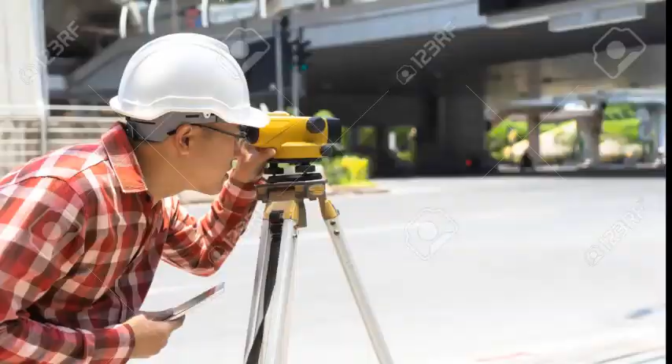In the previous class, we discussed temporary adjustments involved in the instrument. Temporary adjustments are the adjustments done to the instrument before taking readings. We discussed that there are 7 steps involved in temporary adjustments.

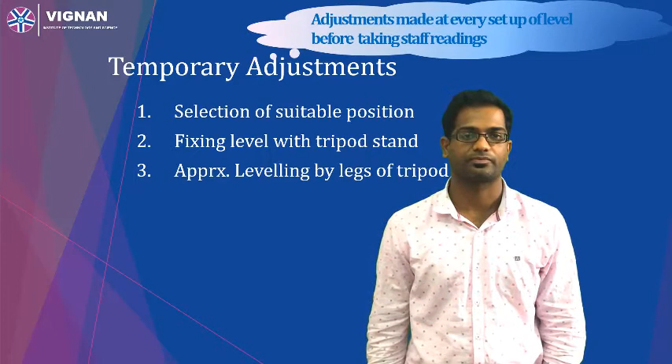Selection of suitable position, fixing level with the tripod stand, approximate leveling by legs of tripod stand, perfect leveling by foot screws, focusing the eyepiece, focusing the object glass, and taking staff readings.

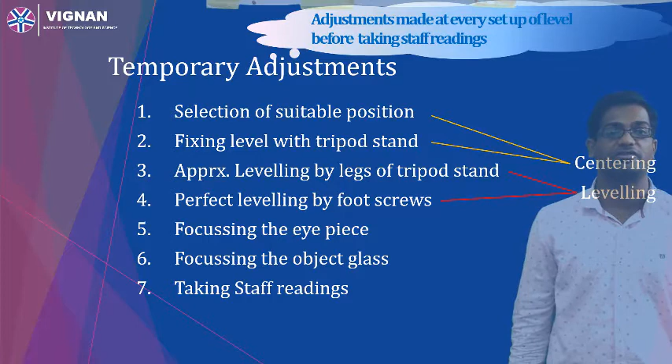These can be categorized into 3. Selection of suitable position and fixing level with the tripod stand can be categorized into centering, which involves centering of your instrument station onto the ground. Whereas third and fourth, which involve approximate leveling of tripod legs and leveling using foot screws, come under the leveling category.

5, 6, 7 temporary adjustments mainly involve focusing. So the entire 7 adjustments can be categorized into 3: one is centering, second is leveling, third is focusing.

In centering, we ensure that our tripod and instrument is exactly over the ground station point where the surveyor wants it to be. In leveling, the surveyor ensures the tripod and the mounted instrument are exactly leveled. In focusing, the surveyor ensures that the objective glass, focusing glass and the eyepiece are clear and the object can be visible.

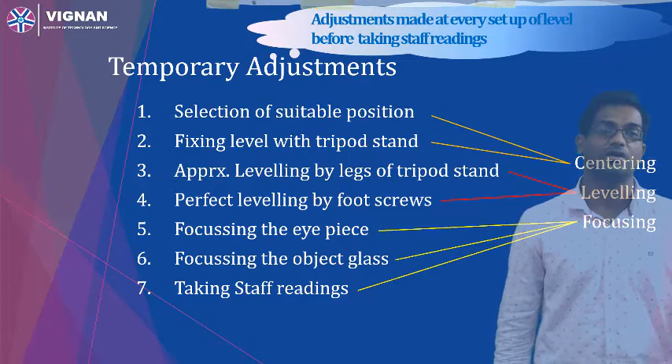We have discussed how foot screws are used in order to make the instrument level. Today we will discuss methods of leveling.

We have learned that we need a line of collimation or a reference line which is used to calculate the levels of ground. In order to calculate the levels of ground, or here onwards I will call reducing levels of ground, you need to have a systematic approach to write down those levels.

In compass surveying, we have 2 systems where we note down the values: one is whole circle bearing system, second is quadrantal bearing system. These 2 systems represent the magnetic bearings using compass. The meaning is same, but the notation is different.

In the same manner, in methods of leveling, we also have 2 methods. The meaning is we need to find out the reduced levels of different ground positions on earth, but there are 2 different systems. One is the line of collimation system or height of instrument.

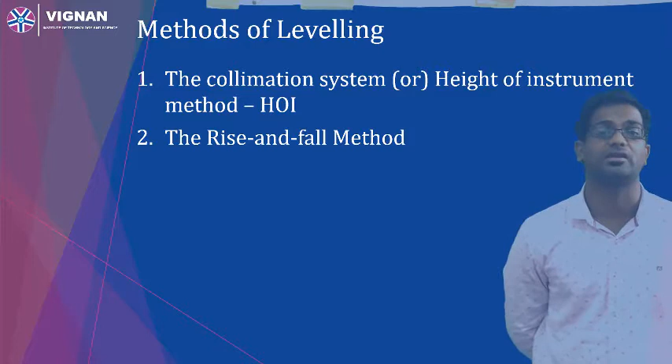The collimation system, or height of instrument method. The second is the rise and fall method. These 2 systems are used in order to calculate the reduced levels of ground points.

Let us discuss the height of instrument method. Observe the diagram very carefully. Let us consider the ground level is in the pattern of something like this. Let us assume that the ground pattern is something like this.

We have discussed that the ground is never leveled properly. In order to calculate the ground levels of these points, we will set up an instrument preferably where we have visibility on all sides wherever the surveyor wants to calculate the reduced levels.

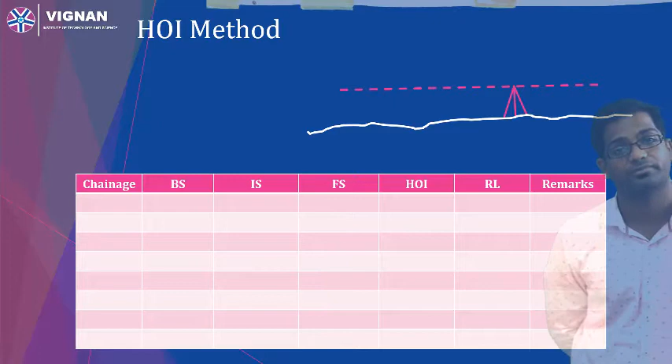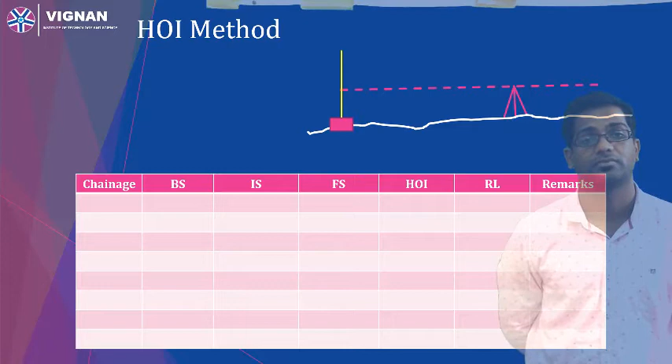When the instrument is complete with temporary adjustments, that is centering, leveling and focusing, you will get a reference line which we call the line of collimation, as shown in the dotted line. Now the surveyor takes the first reading at a known elevation.

This level is called a benchmark. If the benchmark is known to him, he will take that value for his considerations, or otherwise an arbitrary benchmark of 100 meters is taken. Because this is the first reading, this reading is called a backsight.

And let us take one intermediate sight which is taken at A, and let us take B, which is the last instrument staff reading, which we note as a foresight.

Let us do a small problem in calculating the reduced levels of A and B with reference to a benchmark of 100. Now what does this mean to you? You need to calculate the reduced level of A, reduced level of B with reference to the benchmark.

If the benchmark is 100, what about A? Was it 101 or 102 or 98 or 99? How much is it? In the same way, point B also needs to be calculated.

Because staff readings are known to you, at backsight as 1.255, at A intermediate sight as 1.750, and at B foresight as 2.750, by using the height of instrument method, you can easily calculate the reduced level of ground points A and B.

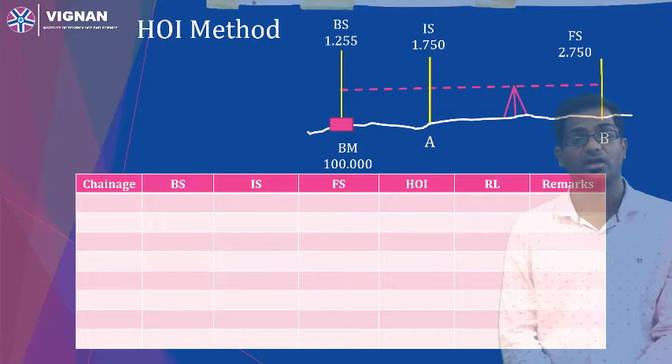First, we need to note down the tabular form given below. The tabular form for height of instrument consists of backsight, intermediate sight, foresight, height of instrument, reduced level, and remarks.

First, we write down the chainage in the column. Let us take chainage at benchmark as 0, and write down that value in the chainage column. At 0 chainage, the backsight reading is 1.255. Against that row, we write in the remarks column 'benchmark', and at benchmark the reduced level is 100.

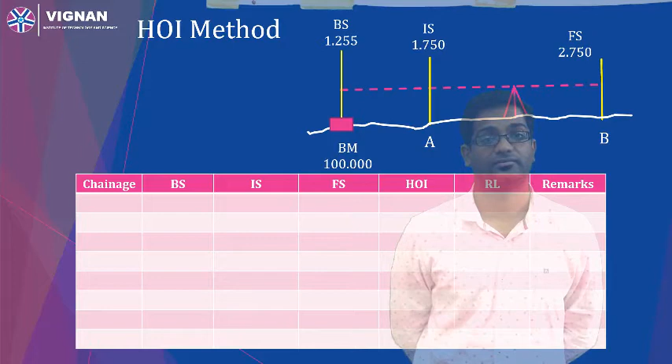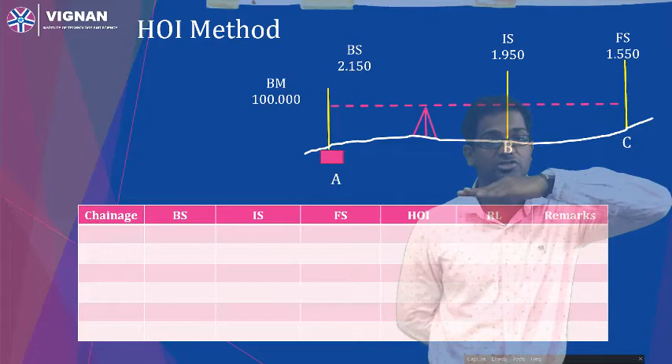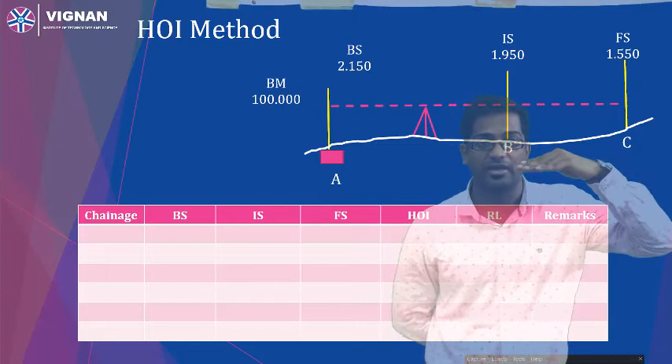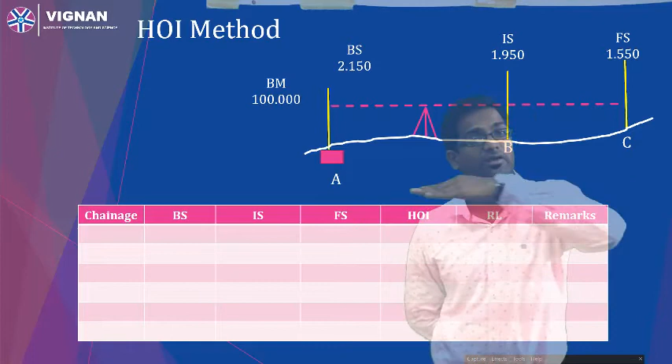In order to calculate the reduced levels of all points, we need to know the height of instrument level. If you know the height of instrument and the readings of different station points, then deduct the height of instrument with the staff readings, and you will get the reduced level of that point. Height of instrument is calculated first, then staff readings are deducted to get the reduced level values. So in the height of instrument method, you always calculate reduced levels using height of instrument, because if we have only one station, we get only one height of instrument.

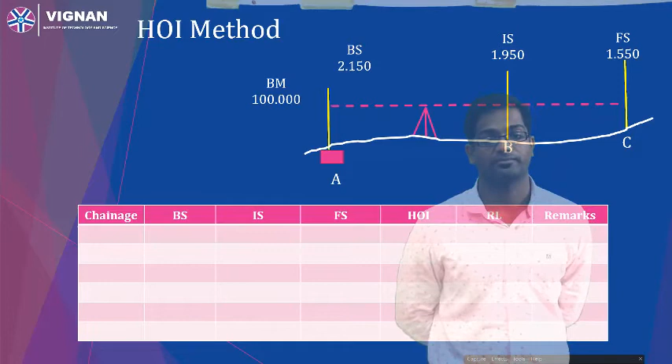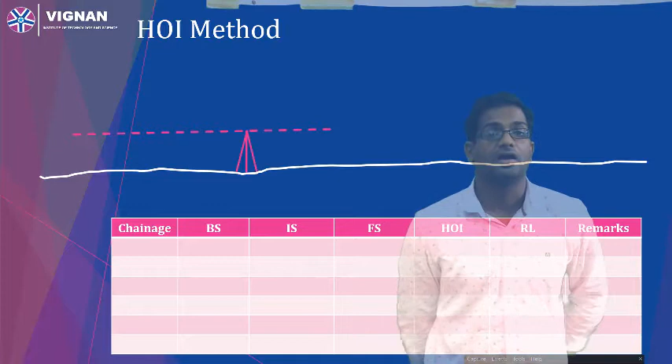Let us take another problem. Let us consider this is the ground profile where a station point is there. It is done with all temporary adjustments and you get a line of collimation. The first reading is taken on a benchmark of 100 with backsight of 1.255, and then there is an intermediate station of 1.750. Let us take that point as A, and then B, which is the last station, with a reading of 2.750. So the surveyor changed the instrument now to another station.

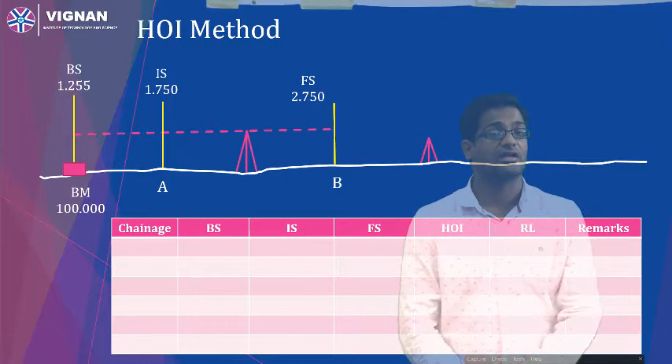I said foresight is the last staff reading before changing the instrument. Now, because the instrument has been changed, the foresight of the previous instrument station becomes the backsight of the next station, as shown there. So backsight of 2.150 is the first point for instrument 2. For the same B point, it is also a foresight for instrument station 1.

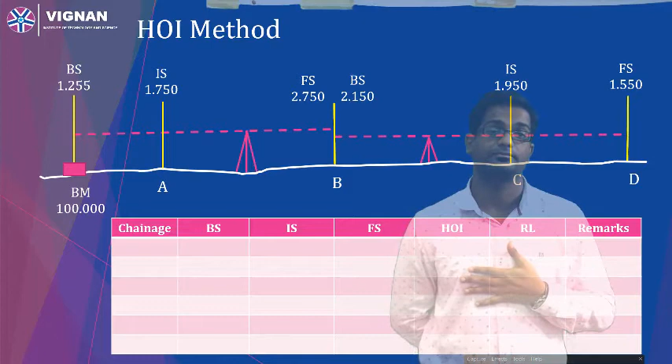After that, the surveyor took one intermediate sight of 1.950 and foresight of 1.550. Because at B station you have one foresight and one backsight, you get the same row with one foresight and one backsight. If at the same point you get foresight and backsight in the same row, it means the instrument has been changed. When the instrument is changed, the height of instrument also changes. The reduced levels of different points can be calculated as height of instrument minus staff reading, which will give you the reduced levels of different points.

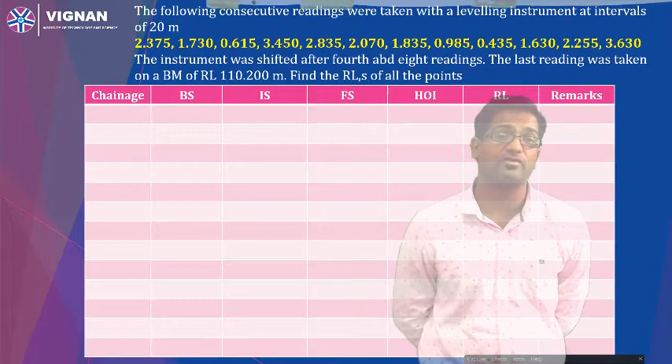There is another method called the rise and fall method. In the rise and fall method, it does not involve much complicated calculation, but if one calculation goes wrong, then the entire chainage level calculations will go wrong. Now how do we do this?

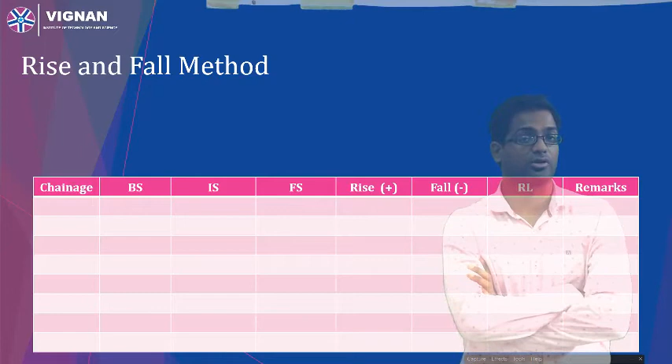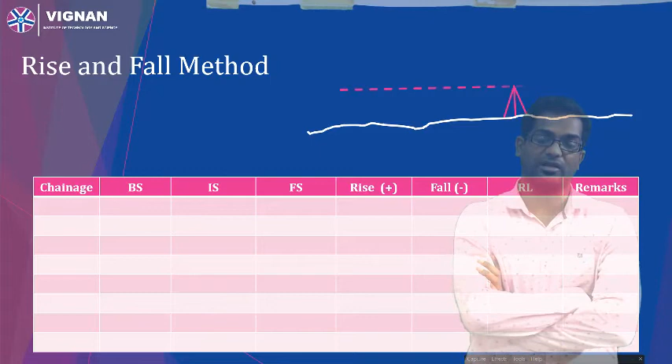Let us suppose the ground level is in this way. The instrument is set up, and all temporary adjustments are done. A backsight is taken on a benchmark of 1.255. Then an intermediate sight is taken at station point A of 1.750, and a foresight of 2.750 at B is taken. Foresight means the instrument station's last reading, backsight is the instrument station's first reading. By using the rise and fall method, you can easily calculate the reduced levels of different points.

In the rise and fall method, rise or fall is calculated by taking the difference of consecutive staff readings. The difference of consecutive staff readings, if it is positive, we write in the rise column; if it is negative, we write in the fall column. For example, the difference of backsight and intermediate sight is negative.

As rise or fall is defined as the difference between two consecutive staff readings, 1.255 minus 1.750 will give a negative value, which we write in the negative column. Next, 1.750 minus 2.750 will give a negative value, which is written in the negative fall column.

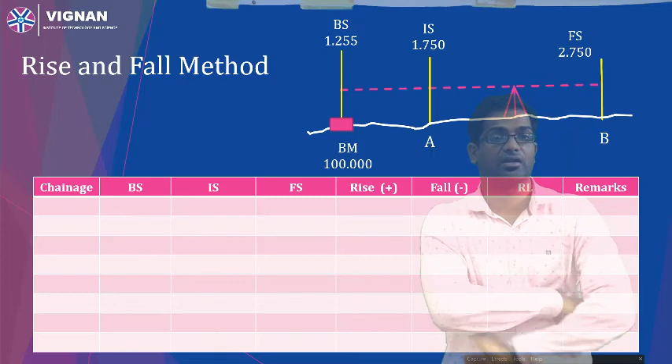As the level at benchmark 100 is known to you, the reduced level can be calculated as reduced level plus rise or fall. If it is rise, we add to the previous reduced level; if it is fall (negative), we deduct from the previous reduced level. In the rise and fall method, the reduced levels of different points are calculated by considering the previous reduced level, whereas in the height of instrument method, it is only used to calculate the reduced levels of different points in a chainage.

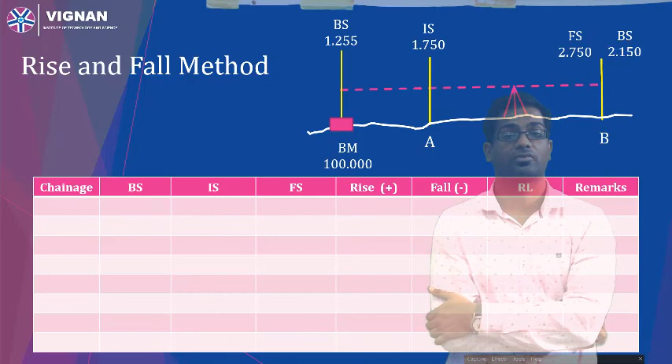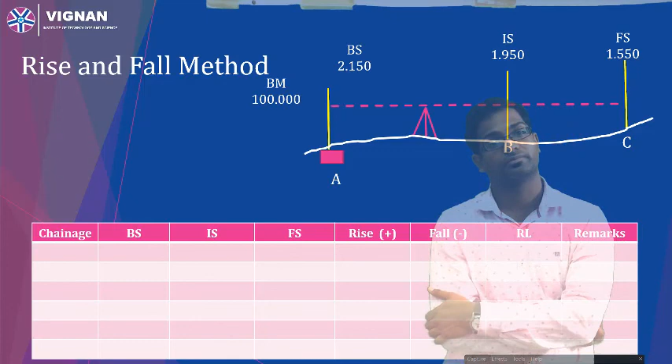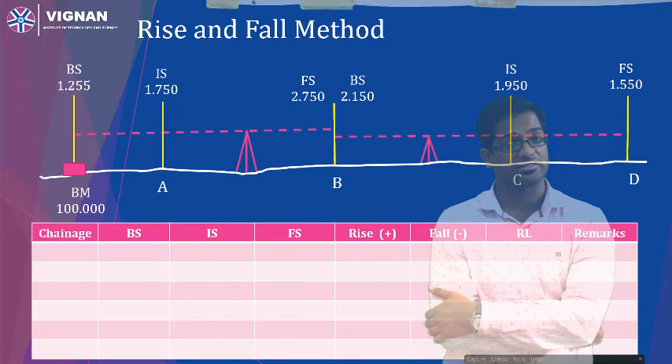I have two problems here, done with the rise and fall method and the height of instrument method. You have to get the same reduced levels. The same problem which was taken for height of instrument, with two instrument stations and the instrument station changed one time, you should get the same reduced levels even with the rise and fall method. This is one of the problems given for your practice, to do using the rise and fall method.

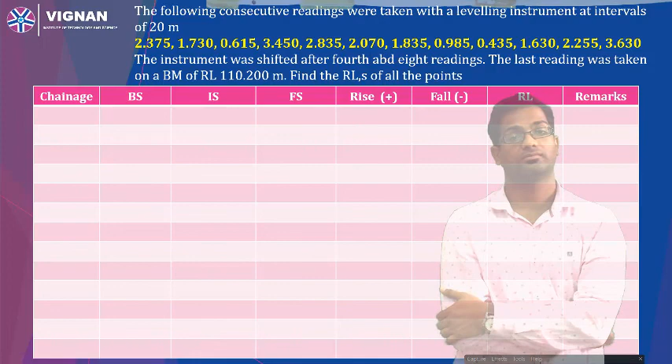There are three numerical problems. We will solve this problem in the next subsequent classes.